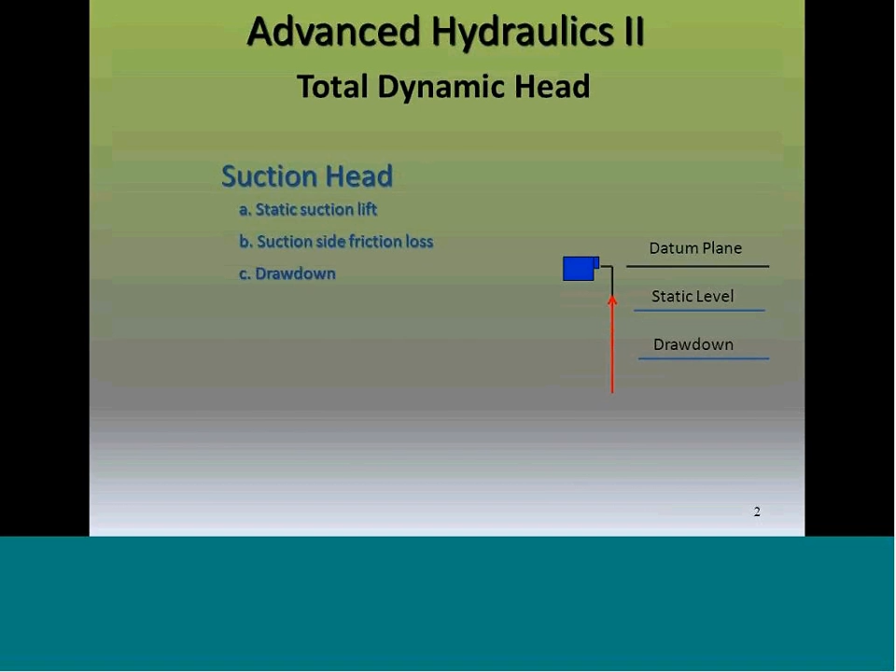Now, on the discharge side of the pump, we're going to work a little bit differently. We're going to look at something called static discharge head, and you'll notice in parentheses there we've got elevation. Static discharge head is measured from the datum plane to the highest point that we want to pump that water.

Again, we can't forget that even on the discharge side, we're going to have friction loss. I would assume there would be more friction loss on the discharge side than the suction side, simply because there's usually more pipe on the discharge side. Again, it's important to try and keep that friction loss to a minimum, because it's going to rob you of pressure. The less friction loss on either side, the better it's going to be for that pump.

Now, the last thing we're going to look at here is the head or pressure requirement. Notice what it says: at the point of usage. So we're going to put a point of usage in here, and what we're putting in is the sprinkler head, and we're looking for 40 psi at that sprinkler head. This could be hooked up to a tank going into a house, and then that would be the point of usage. So your point of usage is where you want your pressure at, and that head or pressure requirement is all determined by what you're trying to accomplish. With the sprinkler, we're just trying to put a spray of water out at a certain radius, so we need a certain amount of pressure to accomplish that task.

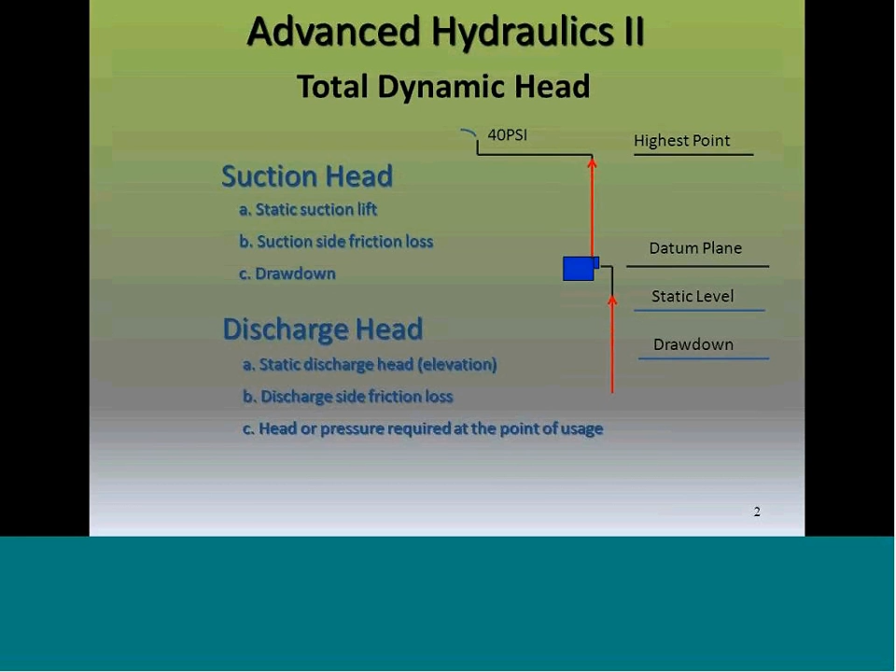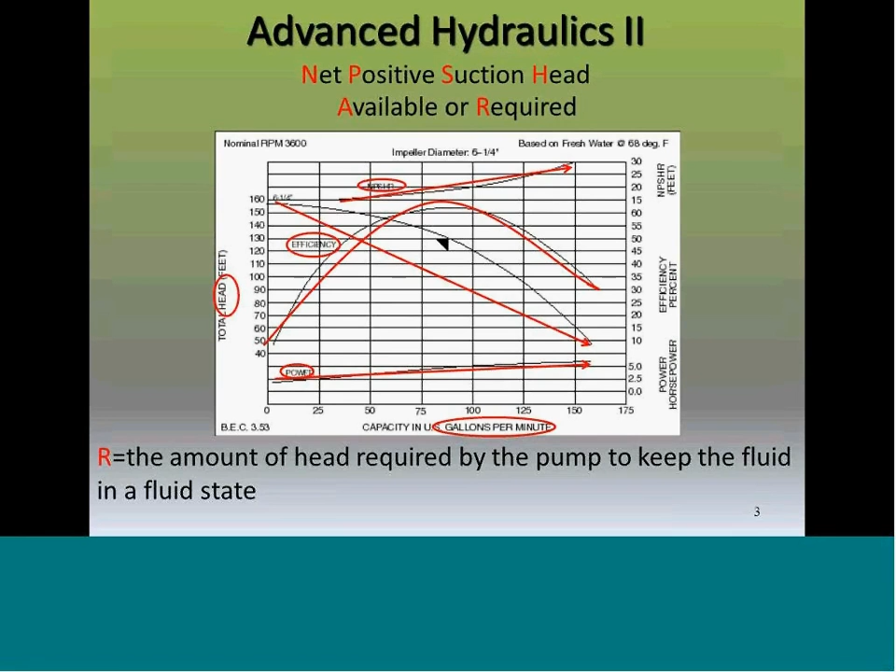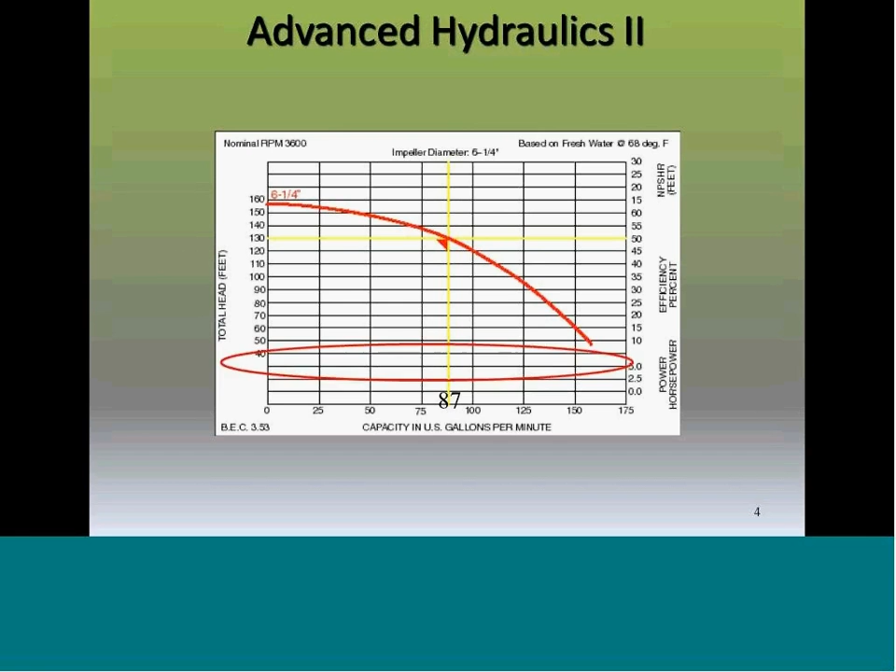So if we look at the head and flow curve here, you're going to notice the yellow line. It represents 87 gallons a minute. Our flow is on the bottom, and you can see we're pumping 87 gallons a minute here. And if we look over on the left-hand side, that's where the head is. So right now at that particular point, we're doing 87 gallons a minute at 130 feet of head.

Remember that as our flow goes up, our head is going to come down, and of course vice versa. As your flow goes down, your head goes up. The next curve we're going to look at here is called the efficiency curve.

The efficiency curve really helps us to understand where the best point is to use our pump. You'll notice our 87 gallon a minute line here, it's red, in percentages of efficiency. And you'll notice that our 87 gallon a minute line crosses at the zenith, or the highest point of that curve. If we draw a line straight across from that highest point, we're at about 62% efficient there.

Now, of course, we're going to recommend that you stay within 5 percentage points of what we call the BEP, or best efficiency point. Now, it can't be 5 percentage points up or down, because then that wouldn't be the best efficiency point. What we're really talking about here is 5 percentage points on the high side of the flow, or 5 percentage points on the low side of the flow.

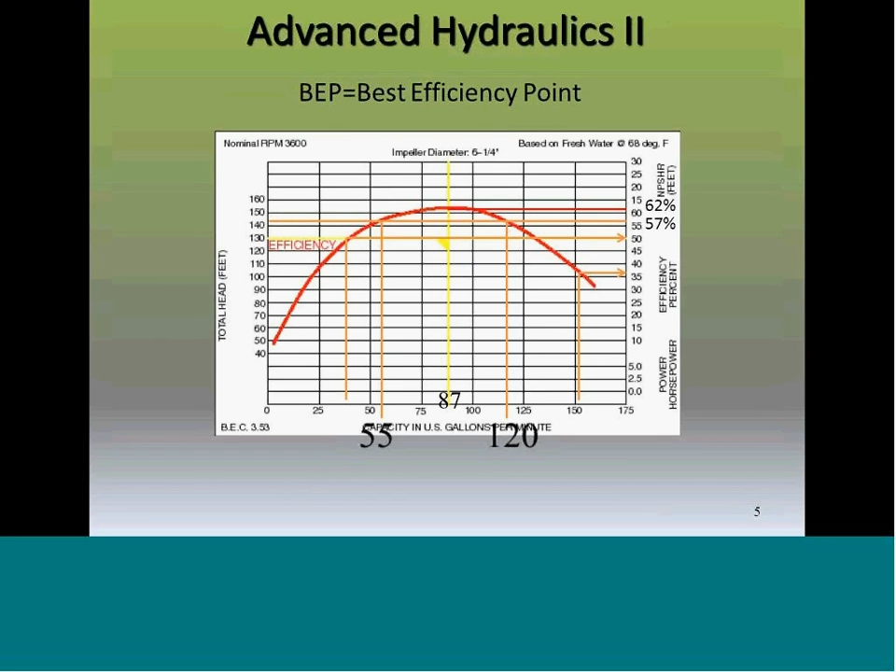All right, now the next curve we're going to look at is called the power curve. Power curve, it's red over here in horsepower.

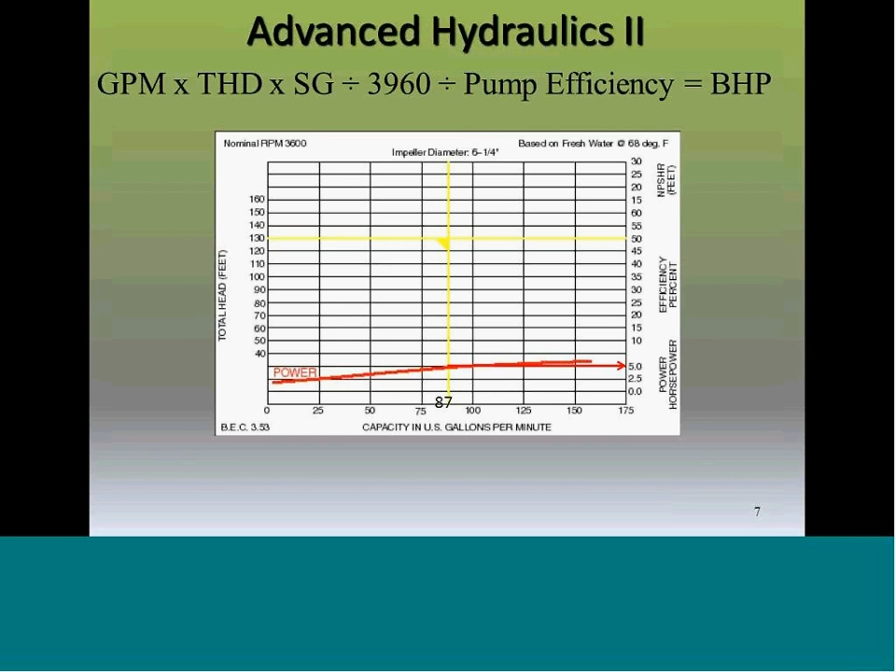We've already talked about gallons per minute and TDH. Let's talk a little bit here about SG. SG stands for specific gravity, and the specific gravity of fresh water is 1.

Now, the reason it's important that we understand the specific gravity of fresh water is 1 is because if we're pumping something different and it has a different specific gravity, that's how we're going to calculate what the horsepower will be required for that. For example, if I was pumping salt water, seawater weighs 1.2 times that of fresh water.

And so therefore, I would need another 20% of power to do the same job. If I was pumping gasoline, gasoline's about 80% of fresh water, and so therefore I would require 20% less energy to do the same job. That's why it's important that we understand about specific gravity.

Remember, 1 times any number equals that number. I know every once in a while I'll get somebody to say, oh yeah, 1 times 20 is 20. Well, yeah, okay, they'll say 1 times 20 is 1. No, it's not. It's 20, that number.

So just remember that. 3960, where does 3960 come from? 3960 is a constant that we use. It's a way of converting gallons into brake horsepower, is the way that I like to explain it. Now, to do that, you have to understand that 1 horsepower equals 33,000 foot-pounds per minute. That's one of the many definitions of horsepower.

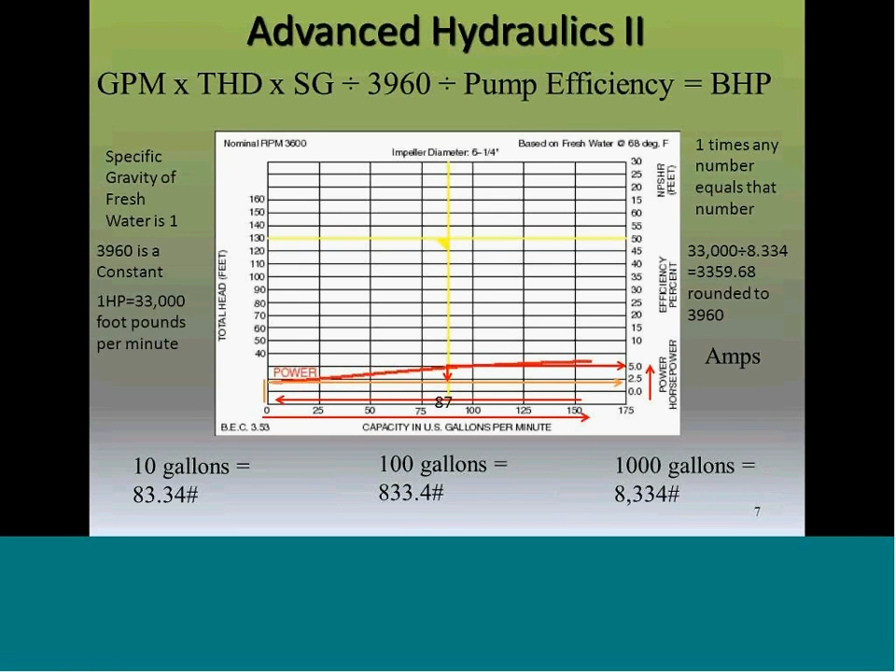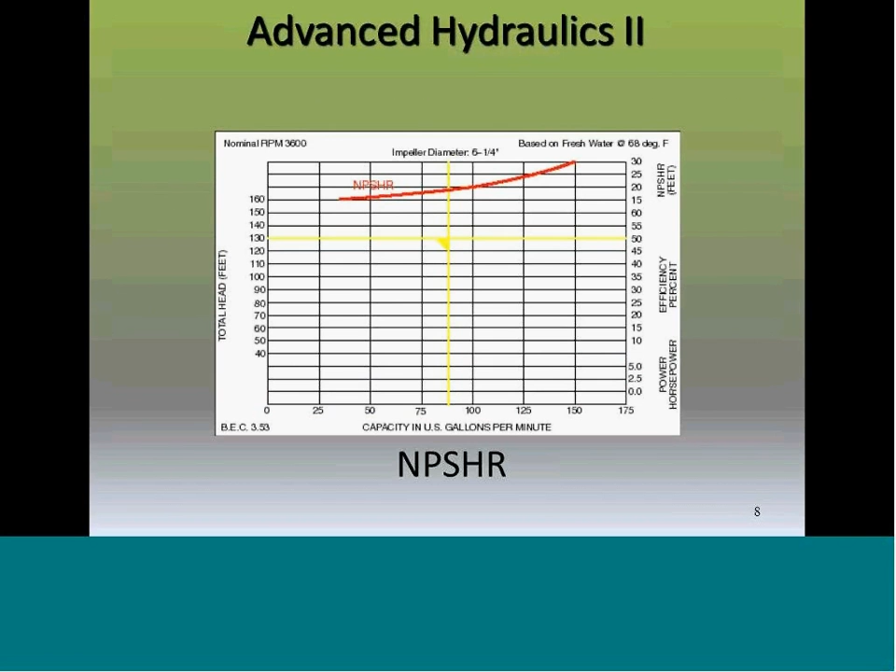Now the next thing we want to look at on this curve, the last curve on this particular pump, is what we call NPSHR, Net Positive Suction Head Required. Remember, it's the amount of head required by the pump to keep the fluid in a fluid state. It's shown in red on the right-hand side of the curve in feet of head, because head is our energy source here. At our flow rate of 87 gallons a minute, you'll notice we come off to the side, and we're probably somewhere around 18 feet.

Now what exactly does that mean that we're at 18 feet? Well, remember from our previous webinars that when it comes to lifting water, centrifugal pumps have approximately 25 feet of lift at sea level. So if we go ahead and subtract that 18 feet from the 25 feet, that leaves 7 feet. 7 feet to do what? 7 feet to design the suction side of the pump.

Now when we talk about that suction side of the pump, remember what we said. The suction side of the pump is made up of two things: friction loss and vertical lift. Both of those things together are going to equal your total suction lift.

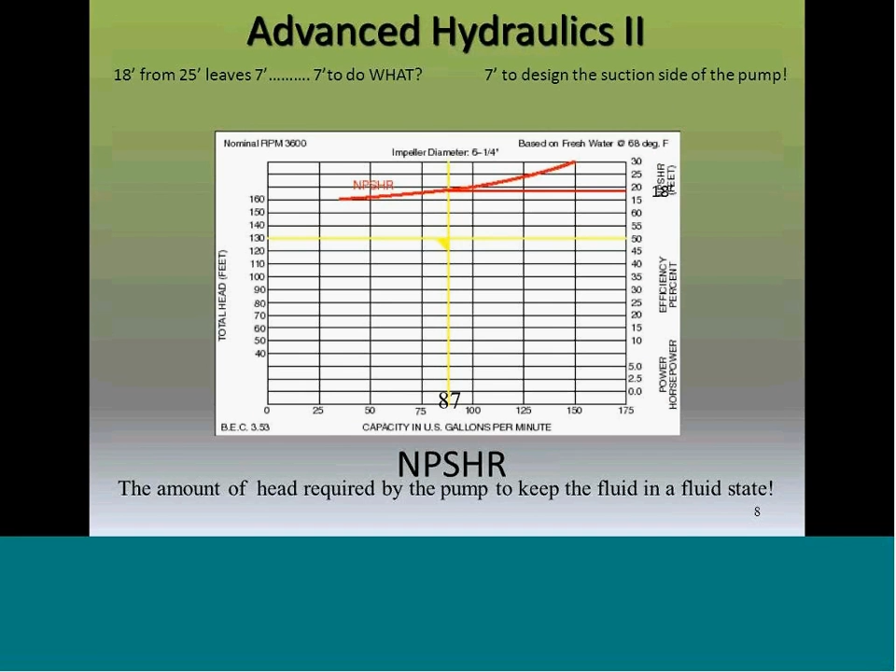So the next thought here then is, what if we're at 55 gallons a minute? You'll notice we come right straight across there, and we're probably about 16 feet of head now. And if we go to that maximum flow we talked about, staying within our range of 120 gallons a minute, now we're somewhere in the vicinity of about 22 feet of head.

So what did we just learn? We just learned that NPSHR is also dependent upon flow, and that as the flow changes, so will the amount of head required by the pump to keep the fluid in a fluid state. It's very important that we understand we cannot change NPSHR. It is a factor of the pump, built in there by the engineer, and you cannot do anything about it.

You can, of course, change your NPSHA, which we'll talk about in just a minute. However, before we talk about that, we're going to go back to this curve again. Remember, this is our recommended operating range. But we're going to get rid of that, because we've got something different we want to talk about now: that curve right there, the 2.5 horsepower curve.

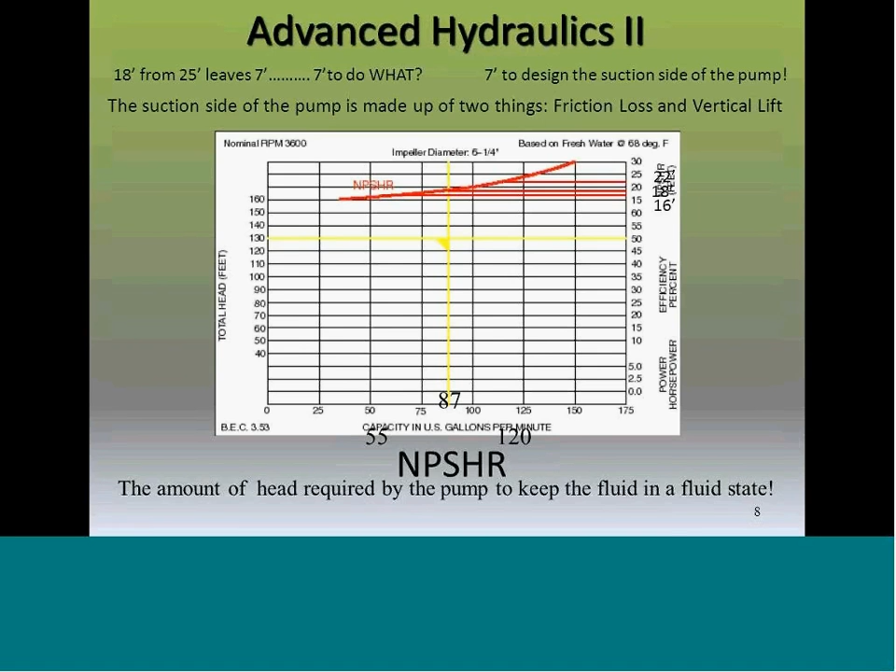When we look at that 2.5 horsepower curve, we go all the way over to the left-hand side, and we're going to find what we call the shutoff head. It sits right around 142 feet. Remember, shutoff head is made up of two things, the suction side and the discharge side, as we mentioned in our last webinar. The suction side and the discharge side of the pump make up that zero flow at shutoff head.

Now, I also mentioned last time that that's not going to change. It's always going to be the same, no matter what your suction lift is, no matter what your discharge pressure is — they're always going to add up to 142 feet. Now, as we move to the right-hand side of the curve, you notice that 10 gallons is probably never going to change. 20, 30, 40 — those numbers are probably always going to be the same.

You will notice, though, that when we get out there at 70 gallons a minute, the curve changes. So we're going to get rid of that curve, and we're going to see what that change is — you'll see it dips considerably at 15 feet of lift. What that means is, at 70 gallons a minute, the curve would be the same as if it was no lift at all. But once we get to that point where we've got 15 feet of lift, now the curve is going to change. Our flow ranges are going to drop off because we're trying to lift too much water too high. So you'll notice that your best efficiency — we said the max flow for this particular pump was 78 gallons a minute.

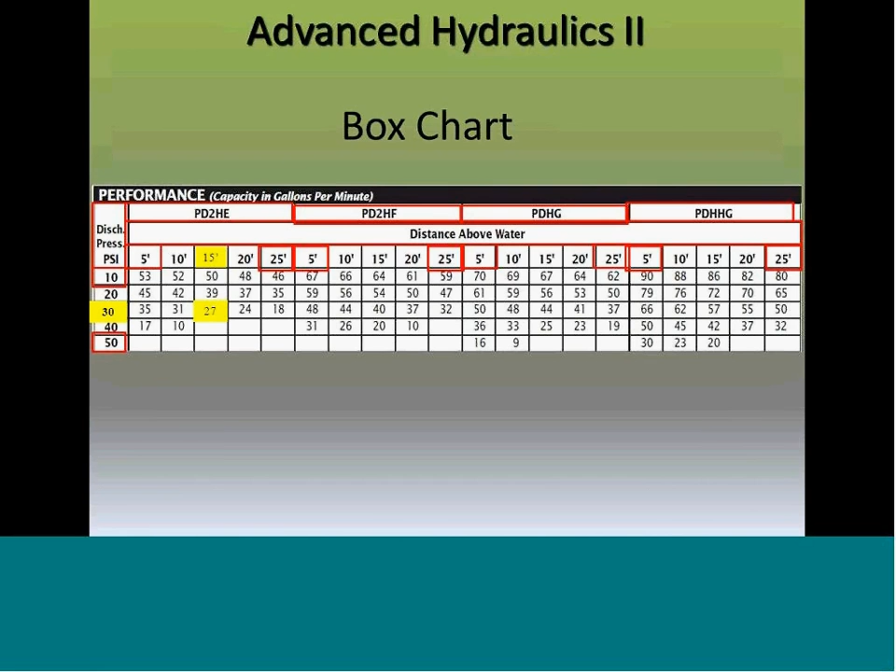And if we go back to our curve, we're going to find that at 85 feet, 15 foot of lift and 30 PSI - 30 PSI is about 70, so 70 and 15 is 85. At 85 feet of head, that pump will produce, as we cross the 1 horsepower line, about 27 gallons a minute. So, yes, indeed, the chart is going to be the same as the curve.

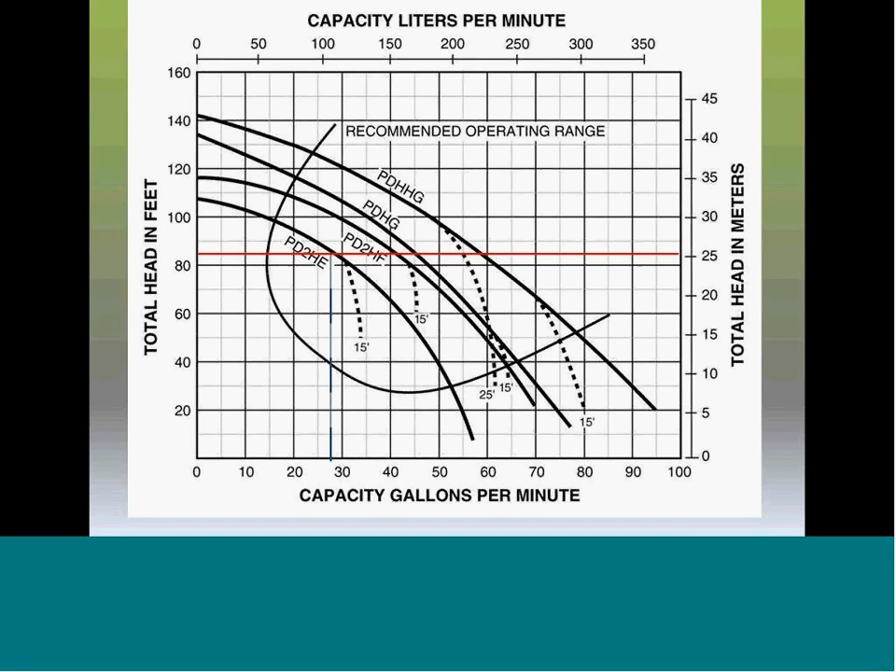Now, remember I said you can't change NPSHR, but this is the formula for NPSHA. And you'll see it says PA minus PV plus or minus Z minus F equals NPSHA. Remember, NPSHA is net positive suction head available to the pump. So, what does it all mean?

Well, PA stands for the pressure over the liquid supply. Remember, if this is just open to the atmosphere, we're talking about atmospheric pressure.

PV is very important because PV stands for the vapor pressure point of the liquid at that temperature. So no matter what the temperature of a liquid is, and we're talking water here, no matter what the temperature of that water is, that water has a flash point, a point from which it will convert from a liquid to a vapor. And in our last webinar, we talked about the fact that that happens no matter what if we drop the pressure over the liquid to that vapor pressure point. So that's got to get subtracted out of there, all right?

Now, plus and minus Z. Z equals the static height above or below the datum plane of the pump. So the question is does the pump have a flooded suction, or are we working with a suction lift application? If we have a flooded suction, we're adding pressure to the pump.

Now, I remember one time we had a pump that was in Colorado Springs, Colorado, which sits at about 6,000 feet. The company that installed it was from here in Wisconsin, and they sent their team out there to put the pump in.

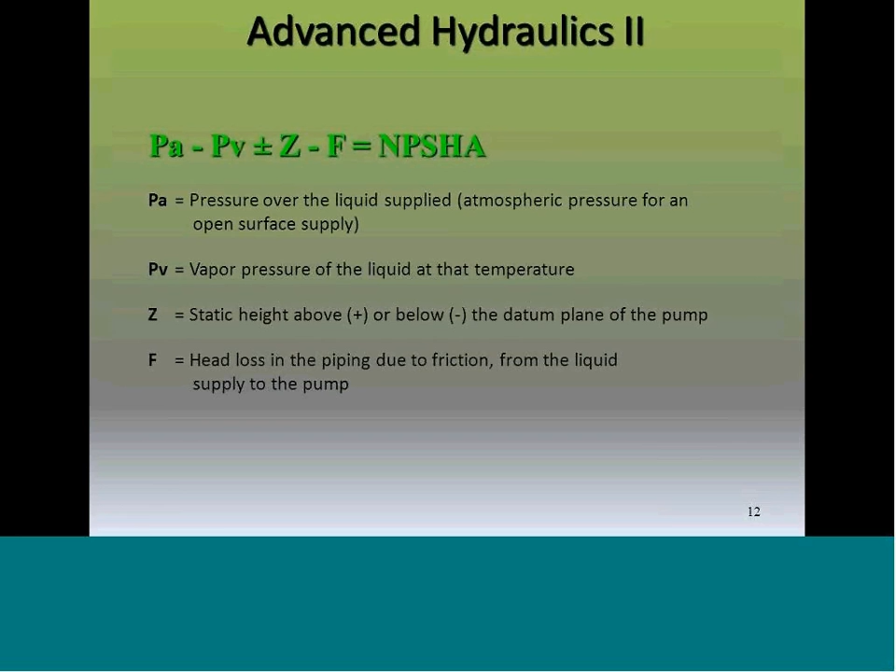You'll notice it's at various temperatures. If you look at the chart, there's a column for temperature, a column for the absolute pressure, and a column for feet of head. If we go all the way over to the right-hand side, we're going to notice that at sea level, 14.7 psi or 34 feet of head, water is going to boil or flash at 212 degrees.

If we move up to Denver - remember Denver's at 5,280 feet, the mile-high city - we're going to find that we're at about 12 psi, which puts us a little over 200 degrees to boil water. And of course, if at the eye of the impeller we get that pressure down to below 4/10, there's a possibility at 70 degrees that you can boil water.

Now, this next slide shows us the same thing, only in a chart form. What it means is everything below that line is liquid, everything above that line is a vapor. So if we go out to the right-hand side of the line and we draw a line right straight down, my guess is at 14.7 psi.

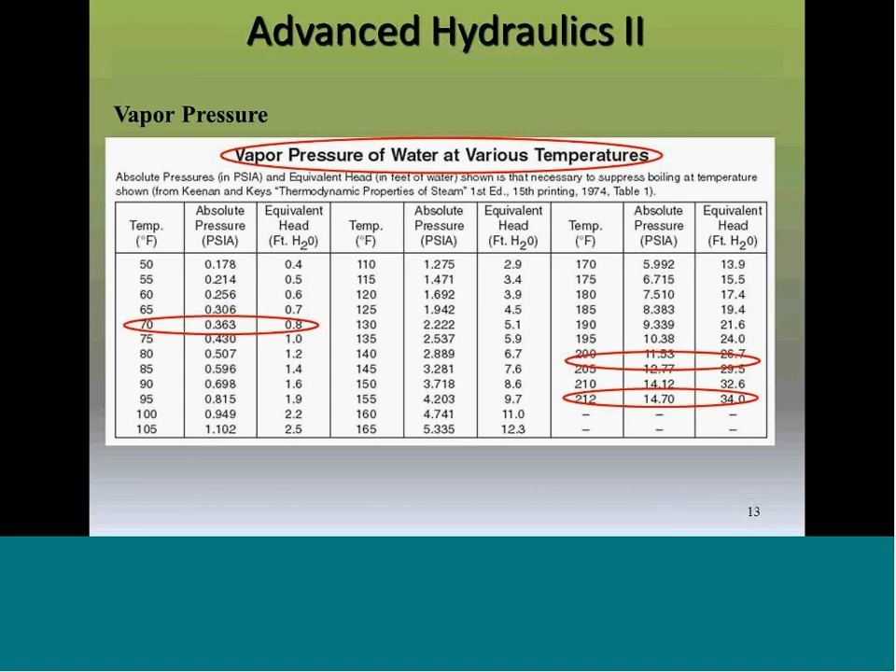And of course, if we go over to the left-hand side from that same point, my guess is 212 degrees, the boiling point of water at sea level. Remember, if we go to Denver, we're at about 12 psi, which puts us a little over 200 degrees.

If you've ever read the side of a macaroni box, it says that if you're going to cook this macaroni at altitude, you must cook it longer. Why? Because at 10,000 feet, water boils at 185 degrees, about 30 degrees cooler than sea level. So because the water's not as hot, it takes longer for the macaroni to cook. You dump the macaroni into the boiling water and let it sit for the same amount of time you would at sea level, and you wind up with crunchy macaroni. Who likes crunchy macaroni?

Now, what if we get down to a half a pound of pressure? Well, there again, we can boil that water at about 70 degrees. So the bottom line is we need to be aware of this, because something's going to happen in our pump. Now, what we just looked at was what we call cold water cavitation - converting a liquid to a vapor based on the vapor pressure point of the liquid, so that at any temperature we can convert it.

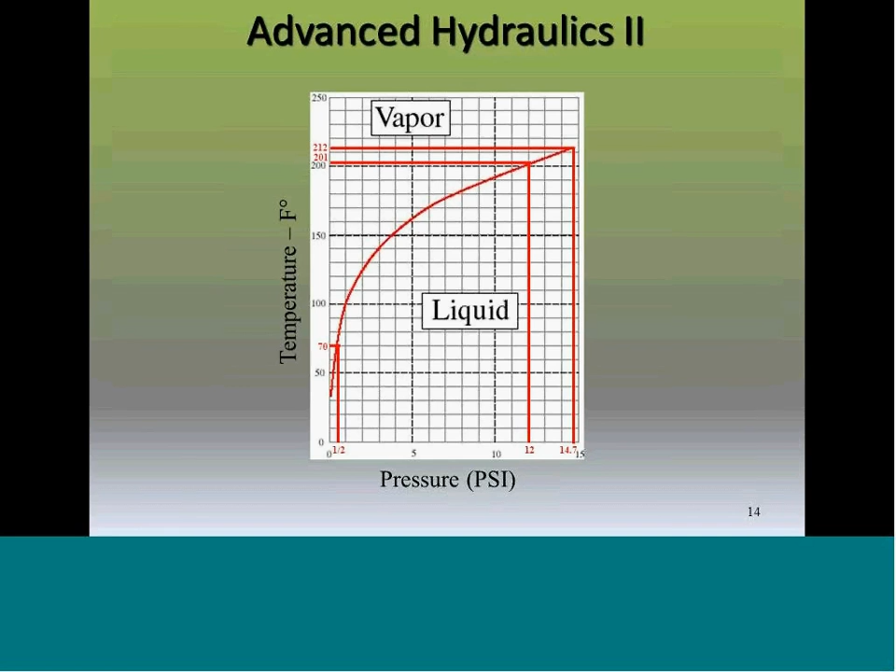Now we're going to take a look at bringing water to a boil by heating it - raising the temperature of the water to the vapor pressure point, instead of lowering the pressure to the vapor pressure point. If you've ever read an owner's manual, it says if the pump does not prime in 10 minutes, turn it off and reprime it. It doesn't say wait - it just says turn it off and reprime it.

Why? Because in 10 minutes, nothing is going to happen. If you wait 12 to 15 minutes, that pump could build up some steam in it, and when you go to take that priming plug out, it'll blow up at you. So you've got to be a little bit careful - but 10 minutes, not a problem. So the bottom line is, if we wait here till our kettle's been on that fire for about 12, 15 minutes, we're going to start to see what are called vapor bubbles appear at the bottom.

Now, of course, you'll notice some of those vapor bubbles are going to break loose, and when they do, where are they going to go? They're going to go up to the top, that's what everybody says. Now, Carrie, think about this: where are we heating the water from? Bottom of the pot. What about the water at the top of the pot? It's cooler. So what happens when the hot vapor bubble hits the cooler water? It implodes, and it turns back to water.

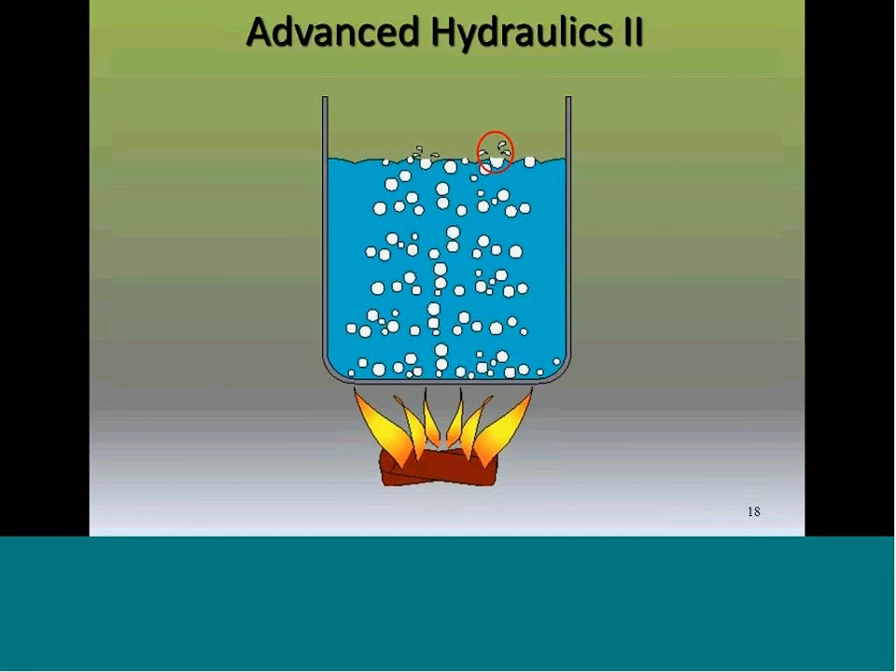Now, that's in a hot pot. We're talking about pumps, though, and because we're talking about pumps, I want to talk about what can happen inside of the pump, because that pump is not going to let that vapor bubble get to the surface. What's going to happen is this: if we do something called open discharge, that means at the pump we're going to have a valve, and we're going to open that valve up as far as it will go, which means we're going to let as much water come out of that system as we can.

Now, remember what Bernoulli taught us: he said that if there's a smaller area, like the eye of the impeller, we're going to have faster moving water. And if there's a larger area, like the peripheral of the impeller, we're going to have slower moving water. Now, remember the purpose of the impeller is to increase that velocity. So as we increase the velocity, we're also increasing the pressure by moving from the inside to the outside of the peripheral of the impeller. And as we do that, if we get this thing moving fast enough at the eye of the impeller...

...we will create cavitation. Those are not air bubbles, those are vapor bubbles. And those vapor bubbles are going to move through the impeller towards the outside, and as they get towards that peripheral, the pressure that's out there is going to start being applied to them. As that pressure hits them, they're going to implode. As they implode, they are going to cause a shock wave, and that shock wave is going to accomplish several things. One of those things are holes in the impeller. Another thing those shock waves can cause is it can cause the impeller to vibrate, and as the impeller vibrates, it's going to send that vibration down the shaft, and eventually you could wind up ruining the bearings. So it's very important that if you notice cavitation, you do your best to get rid of it.

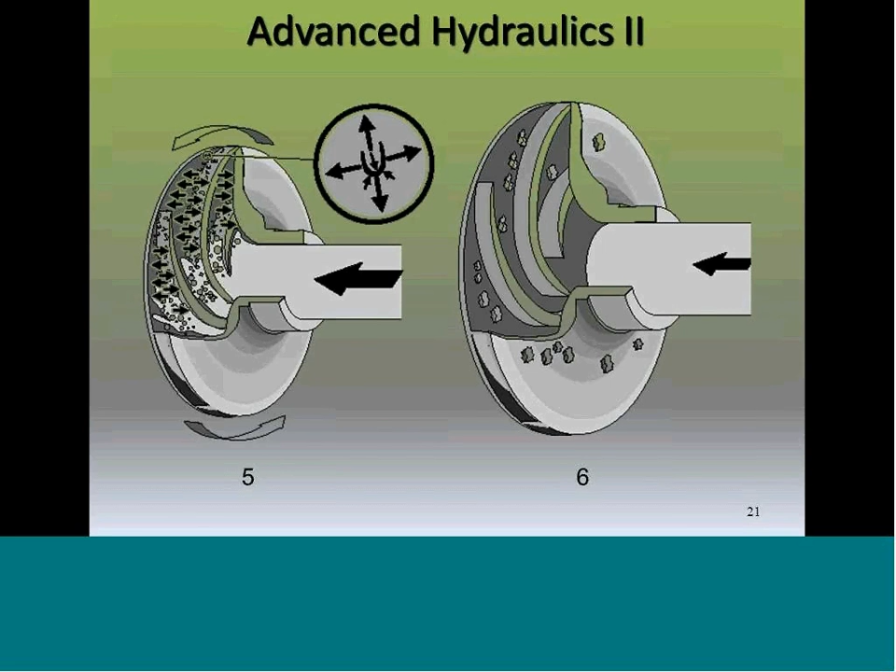This particular impeller, just to tell you the story of it, was used in a farm application, and it was only used for 1,350 hours. The impeller is 18 inches in diameter, and at the time this picture was taken, which was a long time ago, it ranged about $2,000 in price. So when we told the guy, if you would just slow your water flow down, you wouldn't have this cavitation damage and wouldn't have to be replacing this impeller so often, he told us, 'You know what, I need the water, I don't care.' Geez, I love customers like that.

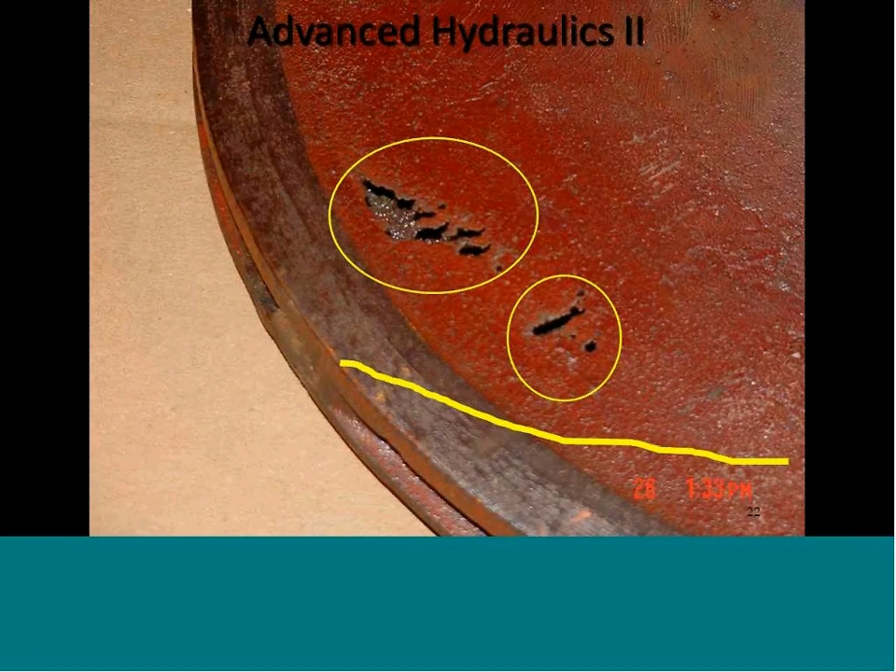All right, when we get into piping, remember we were talking about the piping. You can also get cavitation in piping. Now, what happens is this: we would like to see the water flow through the pipe like that. Is that what's going to happen?

No. Remember from our last webinar, we said that water had weight, it had momentum, and it had pressure pushing it. So all that water wants to move up and go through that one little area there. So we're reducing the area that the water is moving through. And as we reduce that area, something is going to happen.

What's going to happen? The outside of that elbow is always going to have higher velocity and lower pressure. The inside of the elbow, because there's not as much water moving through it, is going to therefore have lower velocity and hence higher pressure.

Now, it's very important that we understand that it really doesn't matter what direction the elbow is facing. If the elbow is facing this way, still the outside is going to be the high velocity, or it could be facing this way, and again, the outside is the high velocity. Look over it this way, and it's still the outside that's the high velocity. So no matter which way it faces, the outside of the elbow is going to be the high velocity.

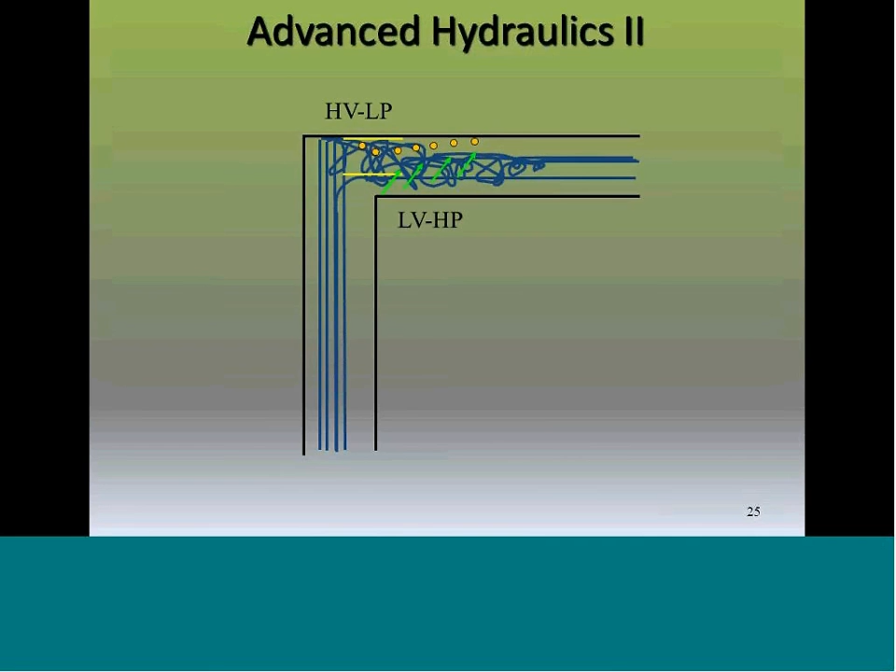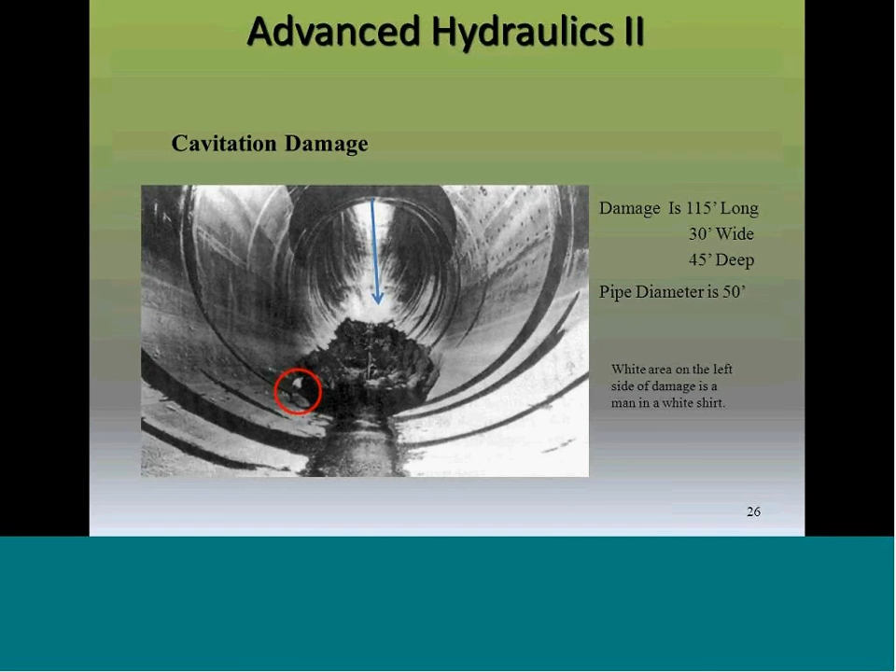You can see here in the picture where the arrow is pointing, that's the curve, the elbow that's in the pipe, a long sweep elbow. You can see that cavitation damage there. If you look at the left-hand front corner of that cavitation damage, you're going to see a white dot. That's a man, okay? The cavitation damage is 115 feet long, 30 feet wide, 45 feet deep. It's a 50-foot tunnel. It's in the Arizona spillway at the Hoover Dam.

Now, the best way for me to help you understand what happened here—by the way, this picture was taken in 1941—is for me to go to the dam website and get this picture. So this next picture, this next slide here, is showing you the Hoover Dam. There were two tunnels dug on the Arizona side, and two tunnels dug on the Nevada side. Now, of course, when they first created the dam, why did they put the dam there?

Those tunnels were in an area where they had to be almost a mile long, and this gave them a straight area where they could put those tunnels.

Why did they build the dam? It was 1934, during the Depression, and this gave the CCC something to do so they could hire a lot of people. It put people to work, kind of like how President Obama improved roads to put people to work.

What else happened? If you look at the bottom of the dam, there are 17 turbines, which means they could provide electricity to the area. And Los Angeles always needs water, so by putting the dam here and constructing a pipeline from the Hoover Dam to Los Angeles, they now have a way to get water there.

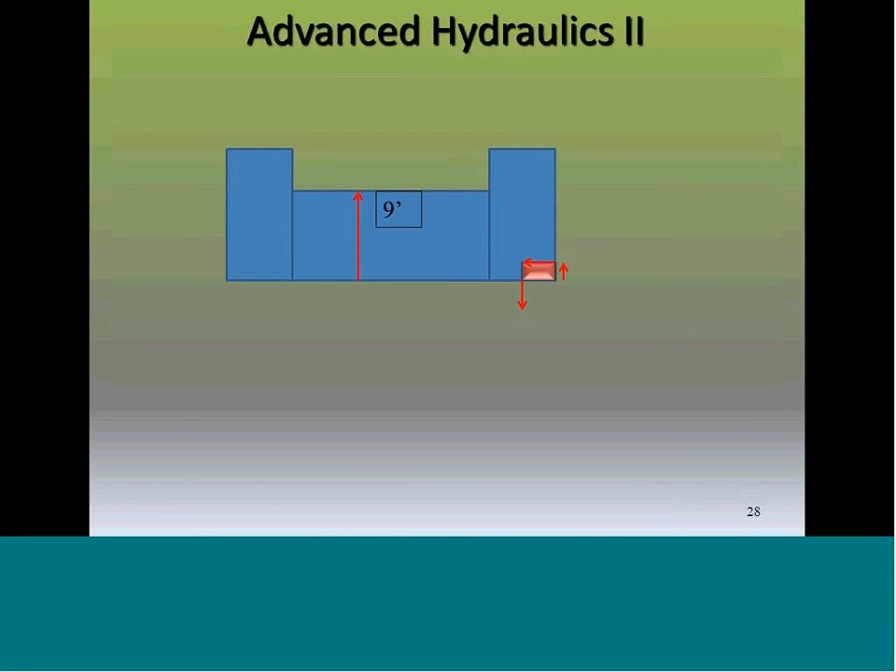Going back to our other webinars, remember that a cubic foot of water - 1 foot high, 1 foot wide, 1 foot long - is 7.5 gallons. So if you go across the crest of the dam, there is 1,244 feet. If I take 7.5 gallons of water per foot times 1,244 feet, I wind up with 9,330 gallons of water - 1 foot back from the dam, 1 foot high, 1,244 feet across, which is about a quarter of a mile.

Now remember, they could raise the level of Lake Mead by 9 feet. So I'm multiplying 9,330 times 9, and I'm going to come up with 83,970 gallons of water - that's almost 84,000 gallons of water per foot. We're talking 1 foot back, 9 feet high, 1,244 feet across.

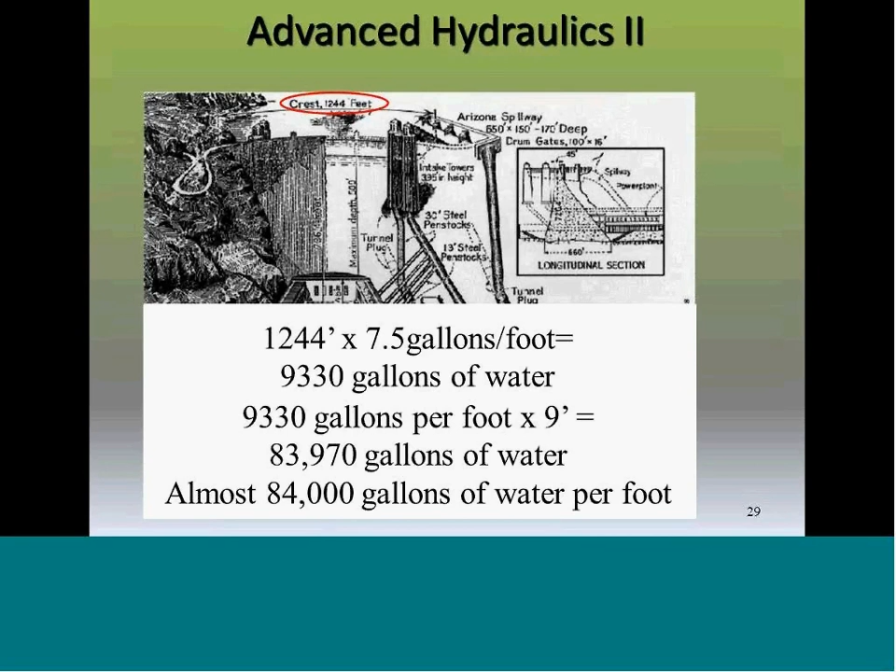Now, of course, the next question that comes up is, how big is Lake Mead? This is a shot from the Space Shuttle Columbia as it passed over the western United States. This is Lake Powell in southern Utah. Lake Powell supplies the water that goes through the Grand Canyon, and on the other end of the Grand Canyon, we're going to find Lake Mead.

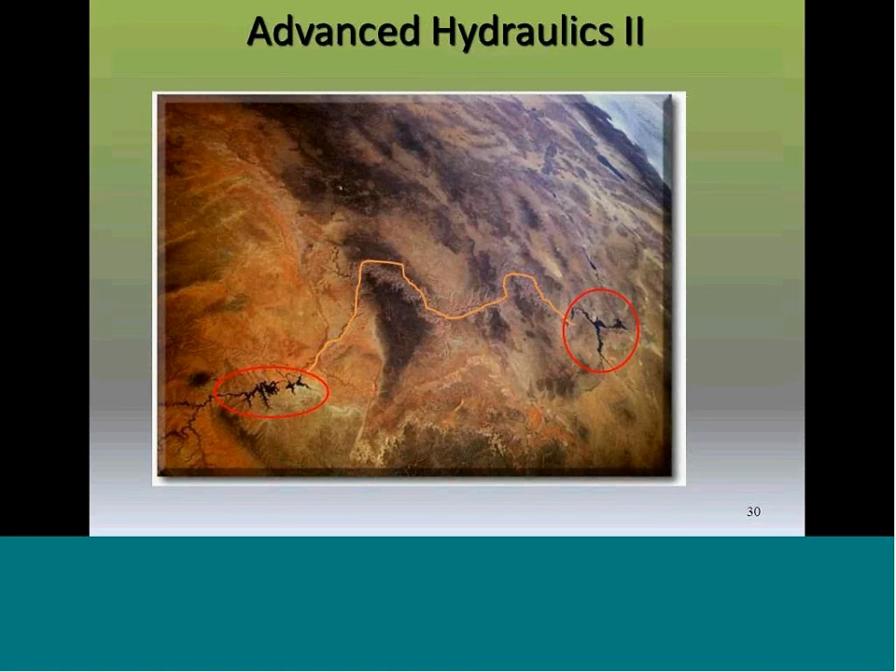Now, can anybody see the Hoover Dam in Lake Mead? The answer is no. You're hundreds of miles away, and it's only a quarter of a mile wide, and you can't see it. Keep that thought in mind, okay? Because Lake Mead is 110 miles long.

So if I take 81,000 gallons per foot times 5,280 feet per mile times 110 miles, I wind up with 47,044,800,000 gallons of water. And you can't even see it in that picture because it's only a quarter of a mile wide. And then in 1941, someone thought it was a good idea to close those spillway doors and allow 47 billion gallons of water to flow through that 50-foot tunnel.

Now, one thing I didn't tell you on purpose is from here, the bottom of the tunnel, or the bottom of the entrance to the tunnel, to the tunnel plug, that's a 400-foot drop. A 400-foot drop is 180 pounds per square inch. And you have a 50-foot tunnel. That's a lot of square inches and a lot of weight of water that comes crashing down on that tunnel plug, all right?

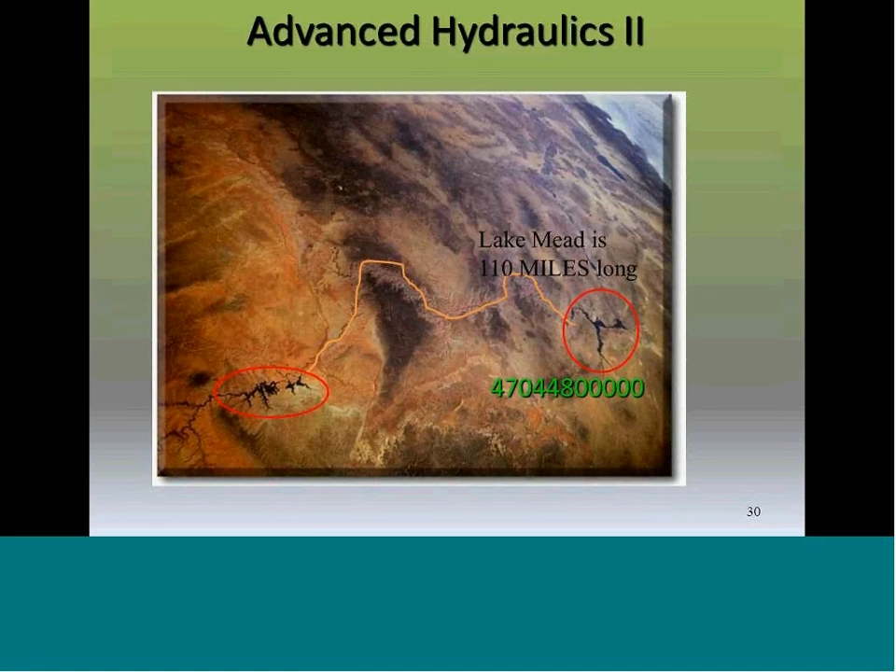Now, the next thing we're going to look at here, we're going to get rid of that. We're going to take a look at the fact that I went to visit the dam one time, and I'm standing right there. I'm talking to a tour guide, and I say to the tour guide, how did you know you had a problem over there?

In 1941, there was cavitation in that tunnel. How did you know it? Now, I'm an ex-Navy man, and I'm thinking to myself, this is like depth charges going on. So they must have felt the vibration. And the tour guide says, well, the story goes like this. There was a photographer standing over here taking pictures of the water coming out over there.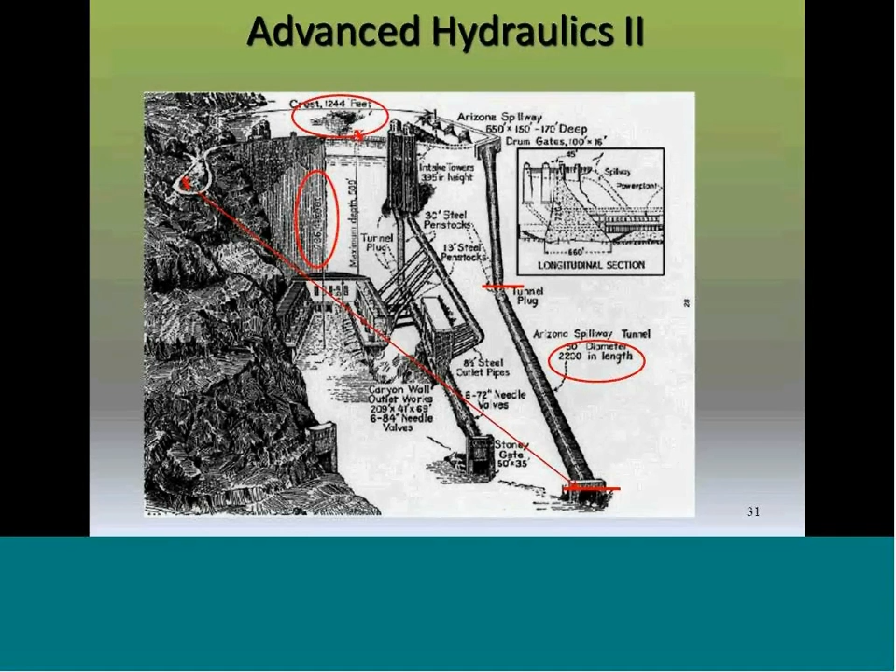Now, some of you might be saying, well, it's a nice story, it's kind of interesting, but how does it help me? I'm never going to work at the dam. Well, neither am I, okay? But I did get a phone call one time from a guy who told me he was using a 70-gallon-a-minute pump for a sprinkling application. All right? He had a problem, though. The problem was every 3 months, 3 feet from the wellhead, he popped a hole in his pipe. Now, I just wanted to say to him, well, it's cavitation.

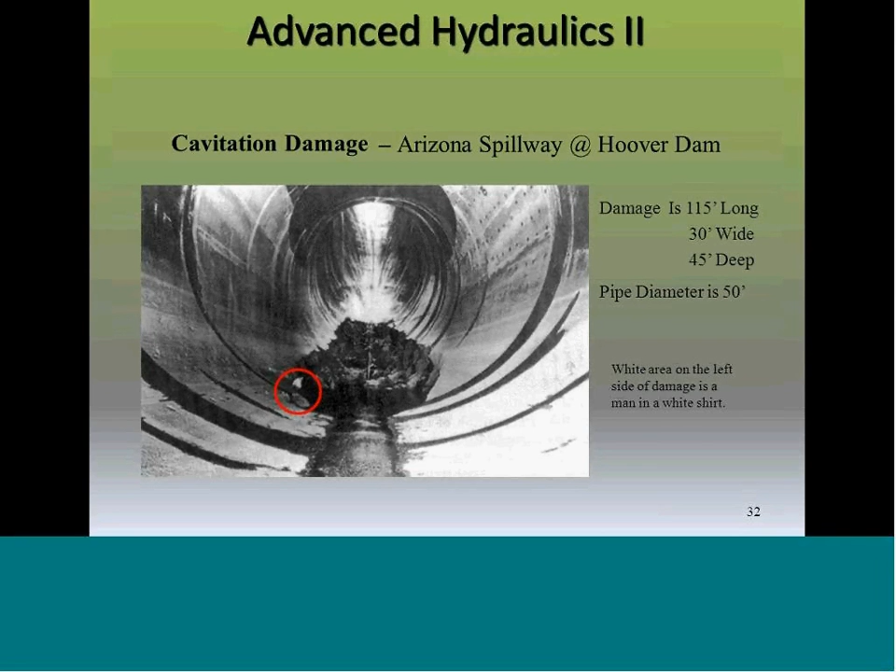But I couldn't, because I knew the next question he was going to ask me is, well, how do I prevent it? I can't help him prevent it because I don't know what's causing it. So I need to figure out what's causing it. So I start out by asking questions, and the first question I ask is, what's your gallons per minute?

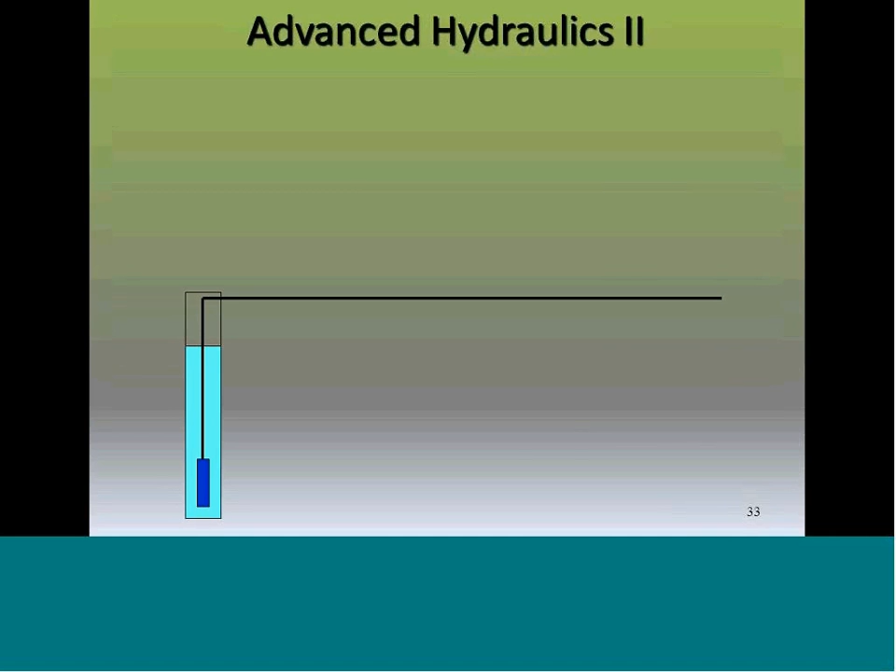And he says 60. Now, 60 gallons a minute with a 70-gallon-a-minute pump, that's not going to be a cavitation problem. I'll bet I know what it is. I'll bet it's his pipe size. So I asked him what size pipe he had, and he says 2 inch. Now all I have to do is look up in the friction loss charts, 2 inch pipe at 60 gallons a minute. What's the velocity? 5.7. Nowhere near cavitation. I have to have a velocity of at least 10 feet per second going through a piece of pipe at the elbow in order to have cavitation. So this is not cavitation.

Well, if it's not cavitation, what is it? Let's keep asking questions. So finally I asked, where's your check valve in the line? He said, oh, there's no check valve in this line. And I said, you do realize with no check valve in the line, every time you turn that pump off, the water's going to go right back down the well. And he says, that's what I want. He was afraid of freezing.

So my next question was, well, okay, if the water goes back down the well, that means every time the pump starts, it starts from whatever the depth of the water is in the well. So how deep is that water in the well? And he says 10 feet.

Now all I have to do is go to the 70-gallon-a-minute curve, and let's start right at the top. I like to take the ruler, and I put the bottom edge of the ruler right at the top of the curve. We're at 600 feet, I start moving that ruler down. Down to 500 feet, then 400 feet, then 300 feet, then 200 feet, then 100 feet, and that little line right there, that's got to represent 50 feet. Where am I going to? 10 feet. At 10 feet, I'm pumping a minimum of 120 gallons a minute.

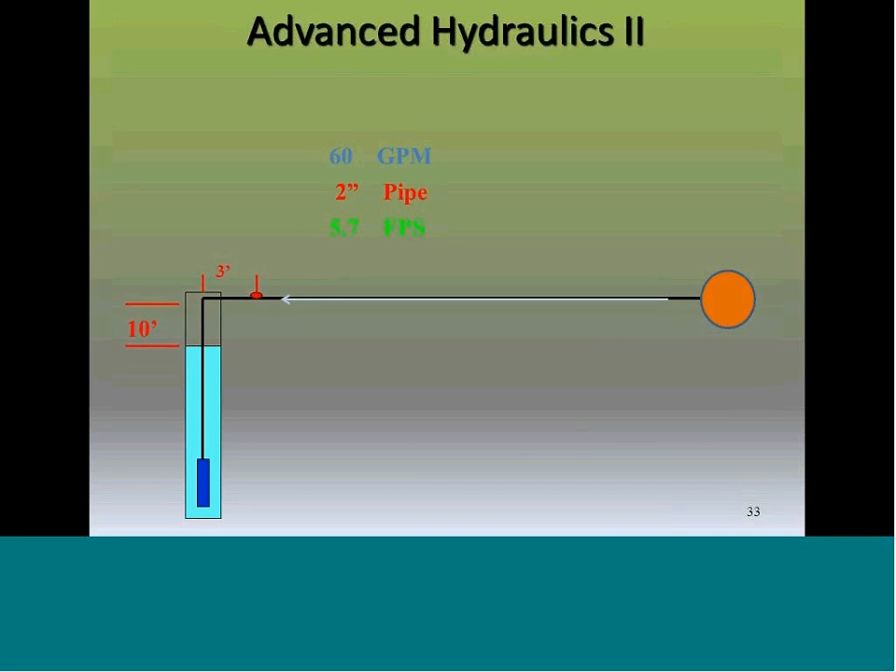Minimum of 120 gallons a minute. So if we apply this 120 gallons a minute to what we learned in some of our other webinars, we know that if we double our flow, what else is going to happen? Oh, that'll double the velocity. That's right. And so now we notice our velocity is 11.5, well over the 10 feet per second we need. And so, therefore, that's our cavitation problem.

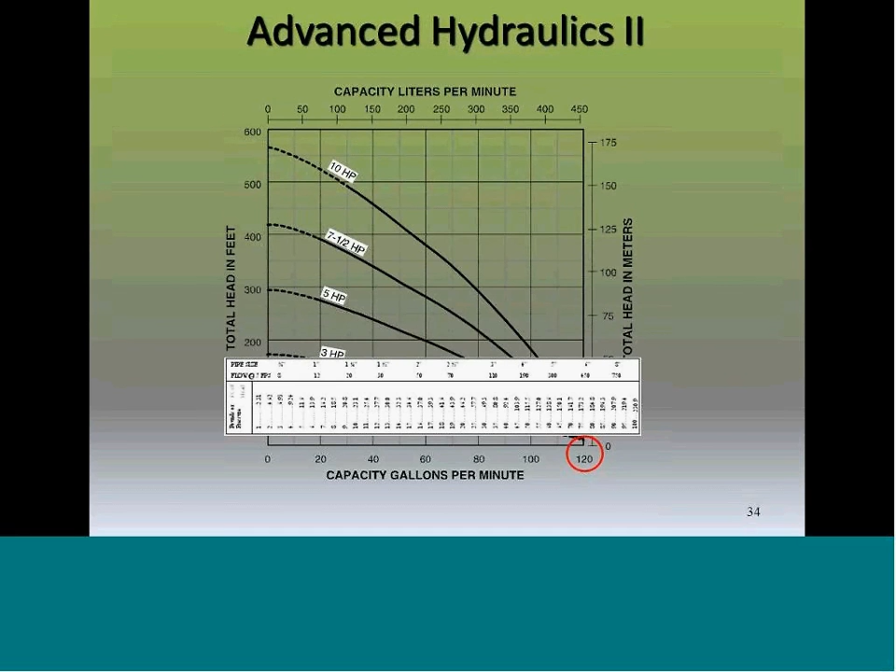Now, of course, there are some solutions. Actually, there are 4 different solutions for this particular problem. Of course, the first is put in a check valve. You put in a check valve, and that means you're going to keep water right up to that sprinkler system, and every time the pump turns off, the water will be right there. When it turns back on, we go right to 60 gallons a minute.

The second solution is larger pipe. If I put in 3-inch pipe at 120 gallons a minute, the velocity is only a little over 5, about 5.1, less than what I've got now even. So I could put larger pipe in, but of course, that's a little expensive, especially since I've already got all this 2-inch pipe in.

Another solution would be to go ahead and put in a flow restrictor. Remember, the sprinkler heads themselves are the flow restrictors. So the bottom line is, if I put a flow restrictor right there at the pump, as soon as that pump starts up, it's immediately at 60 gallons a minute, and I don't have to worry about it. It puts the right back pressure on the pump, and everything works just fine.

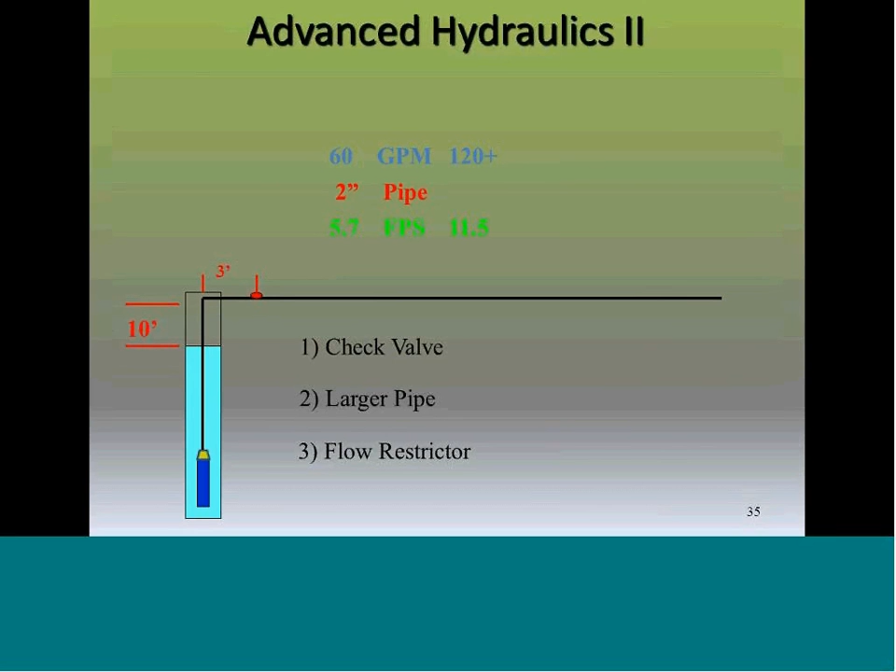The fourth answer is put in a variable speed drive. If you put in a variable speed or variable frequency drive, you're going to be able to tell the drive, I want you to turn the pump on at half speed. Remember, at half speed, I'm going to get half flow. So half speed is 1,800 RPMs. Half flow is what I just happen to be looking for, 60 gallons a minute. So I say, stay at half speed for a minute, and then once you get up to a minute, then you can go ahead and go to...